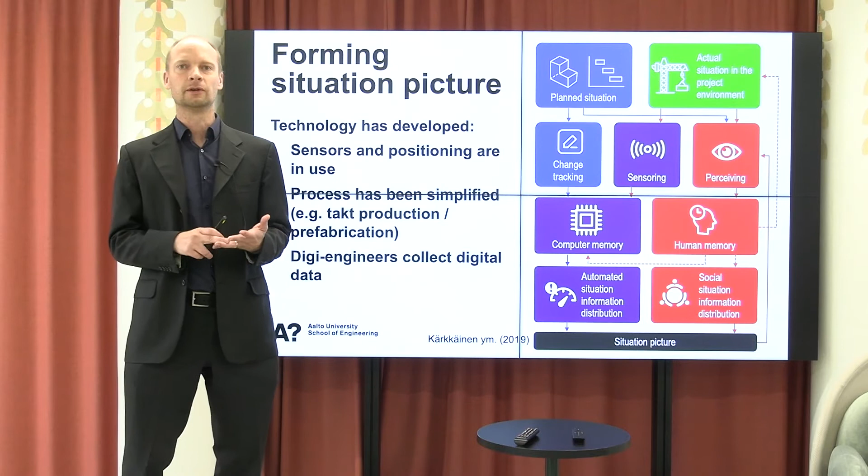Now with technology, we are getting new alternatives how to get situational awareness, and we call it digital situational awareness. We have sensors, we have cameras, we have all kinds of technologies that can be integrated, and situational data can be collected automatically. And this can all be saved to computer memory and automatically distributed. So now we have developed technology. There are sensors, there are positioning beacons, machine vision. We have simplified process. Big companies are implementing prefabrication and takt production, and digital engineers are collecting digital data.

But whenever we measure situation picture, we don't see that pretty results. For example, here you can see that when we measure how much the workers are in work locations, they spend 52% of their time in work locations altogether. But if you measure the time they spend in work location without interruptions, and they have to be present for 10 minutes in the work location without going away, we get down to 34%. So only 34% of the time people are able to work without interruption in construction sites.

When we look at whether they are in the correct location assumed in the plan, we get around 50% of the time. So out of this 34%, 50% of the time is where the plan is assuming the people would be. So we get a track record of 17%. We have defined a couple of KPIs based on this uninterrupted presence. The first one is presence index, which is uninterrupted presence in a task divided by actual duration of the task. Out of all of our measurements, we get 34.5% average with large variation. And variability, of course, is the root of all evil.

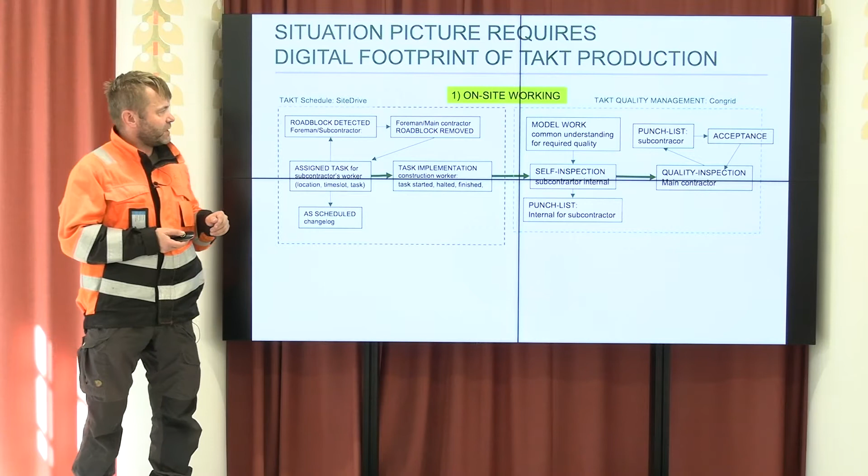We have the scheduling software in which we assign tasks for certain time slots for certain subcontractors and their workers. We receive from the site the acknowledgements when the task is started, finished, etc. A very important part is the roadblock management, so that the subcontractors let us know immediately if there is something that prevents them from implementing the tasks, and then we can have half of the footprint of the takt

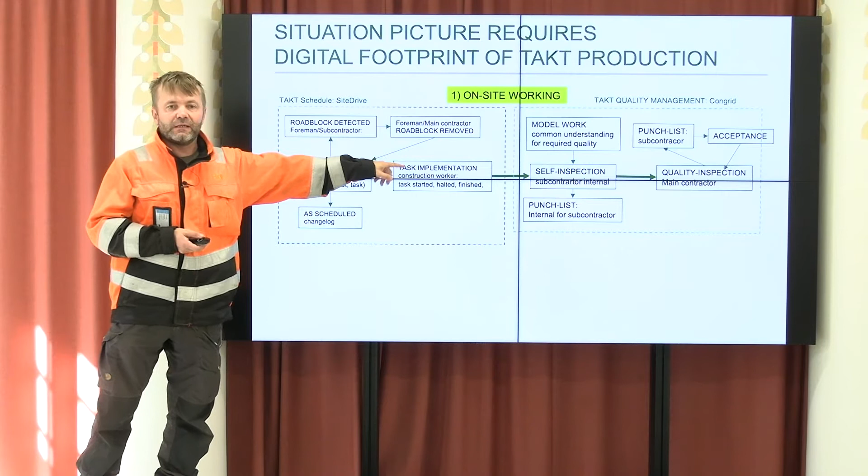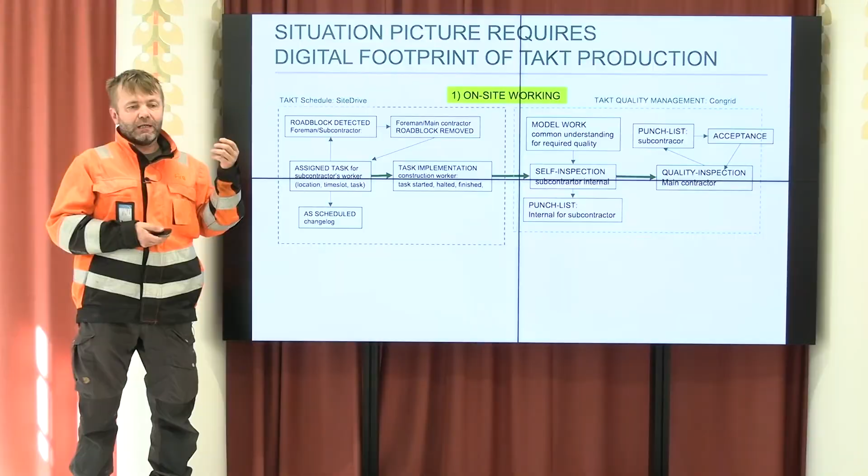production. But the main thing is finishing the tasks, so we have to have the quality management in place, and we have to have applications by which we can check the data, check the sites, update the data, etc. directly on site, so that we enable the real-time situation picture for the site office. And this is good. This is what we have done in 2 years.

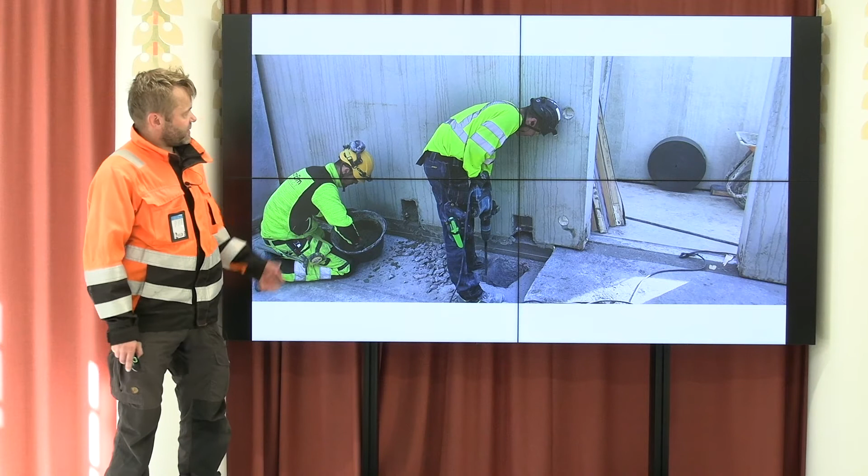But the next step we took was to change from the closed database to the platform. We moved with Google. We got very powerful equipment for the data management, and also we started to integrate more and more applications, data sources, and continued the visualizing with the business intelligence. This took us to the second stage or second generation, where we managed to provide the data from the production to the business unit. Business unit meaning the management for the whole housing department, for example.

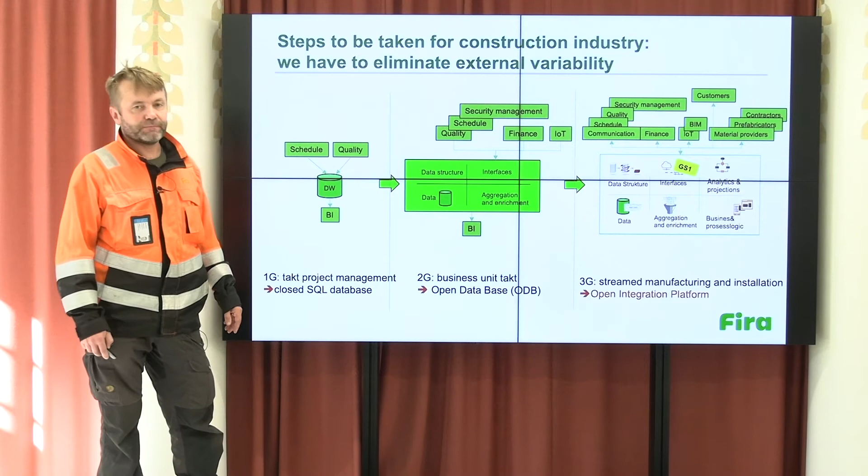Hi, I am Rita Lavikka, a senior scientist at VTT, Technical Research Centre of Finland. I have had the pleasure to be involved in digitalizing construction workflows in the DiCtion research project. Construction is often a project-based business where a new type of product, often based on competitive bidding, is being built through a process negotiated by project parties not familiar with each other. Each company, naturally, works to suit its specific interests and thus optimizes its processes based on these interests.

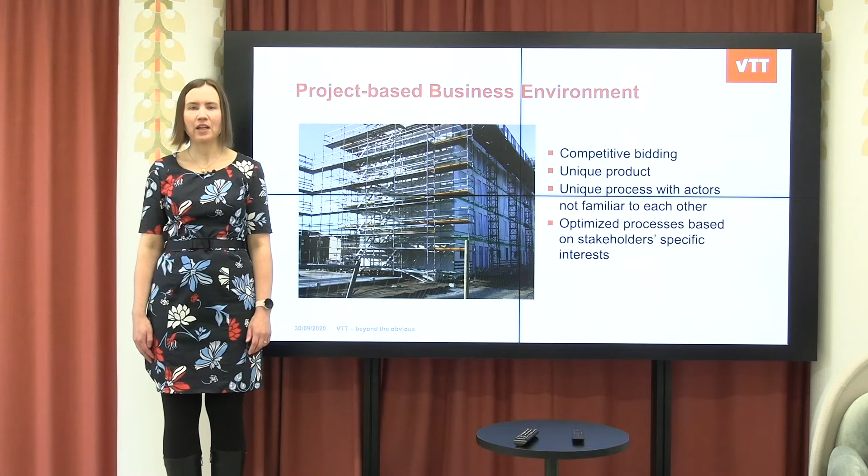In this kind of an environment, transparency of operations is required to enable collaboration. Implementing digital tools on site will result in greater transparency. Digital tools provide us with situational awareness, which tells what has happened, what is happening, and what will happen in the project. Unfortunately, many of the current contract forms are not transparent, and thus digital technologies are often opposed by parties who feel that they could reveal mistakes and make project parties more vulnerable to claims. Some companies even have business models that are actively benefiting from the lack of transparency, especially in the traditional design-bid-build environment.

New digital tools have been implemented fastest in contract forms such as alliance and integrated project delivery, which require transparency. In other contract forms, it looks like the owner must have an active role and require greater transparency for digitalization to happen.

Trust is a key prerequisite for creating digital situational awareness, which necessitates the sharing of data between project stakeholders and documenting the whole site with images and also recognizing the activities of workers. Even though digital tools can provide us with transparency, opportunities for misusing data exist.

Today's construction processes are based on blaming others for mistakes, but with situational awareness, the real root causes of problems will be revealed. Thus, all mistakes are visible and cannot be easily explained away. Transparency enables continuous improvement, but can also be used to attack the party who made a mistake. If technology is used in this way, there will be massive opposition.

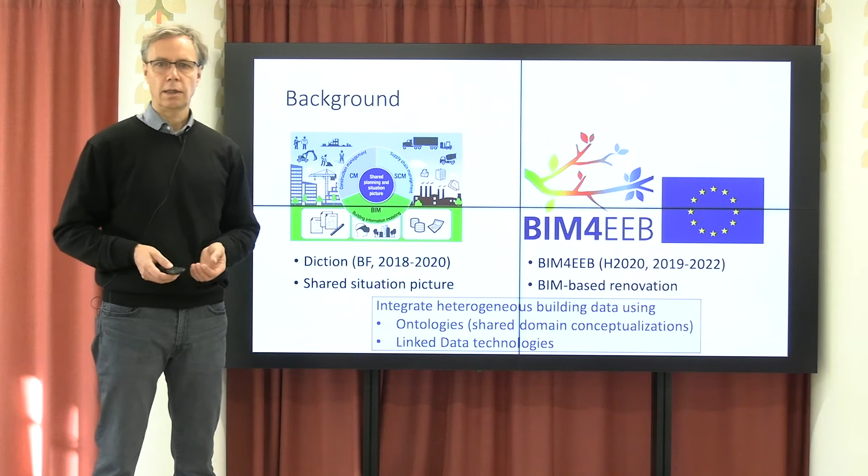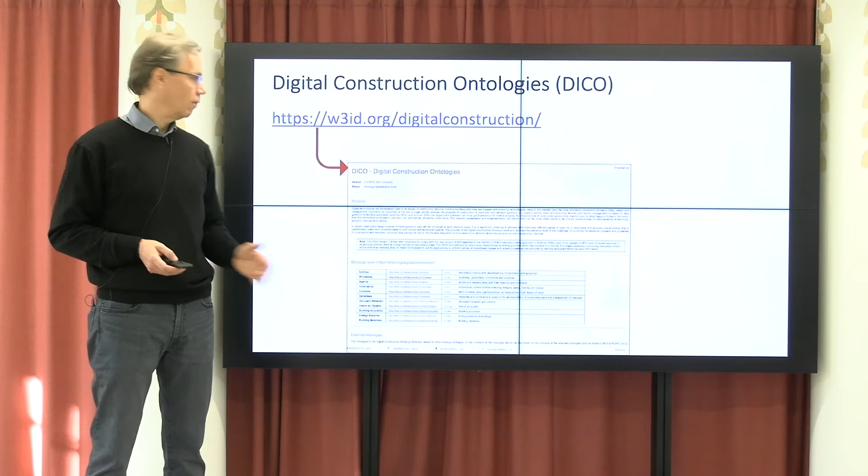And the common theme in both of these projects has been the integration of heterogeneous building data using ontologies and linked building data technologies. And we have developed a set of ontologies called digital construction ontologies, and we have published them on the web. There is full documentation available about each different module of the ontology, and there's also the source code of the ontology available. And the ontology is pretty broad, and it covers the different entities in the construction domain.

So the central ontology is called the entities ontology, and then there are further ontologies that specify different kinds of activities and processes, different kinds of agents in construction, and information content entities that appear in construction and renovation projects. In this use case, we have actually mapped this ontology to the data that's produced by the different companies.

Thank you. Hello, my name is Viitanen. I'm coming from the company called Carinafour, and I will show the short demo of our system called CALS, Carina Assembly and Logistics Service.

So actually, shortly, Carinafour, some 8 years old company, 14 million euros, 100 workers, takt-based production and logistics since beginning, big customers in shipbuilding and constructions. Our job is to actually take care of the material flows and enable continuous workflow. And if we go very simply through the basic elements in production and logistics in the value chain: the production is easy to run if you have the work instructions, resources, materials for the work tasks, then the progress-based scheduling. And our job is to handle the logistic part, provide the materials to the production, and

then we need the information, location-based material lists, material availability tracking, and then the material identification. And we need to be connected based on the same scheduling which is running the production. And the idea is that we have the takt production, work phases, and then we have what we are calling work packages per work phase or per takt, and then we have defined the material lists per takt.

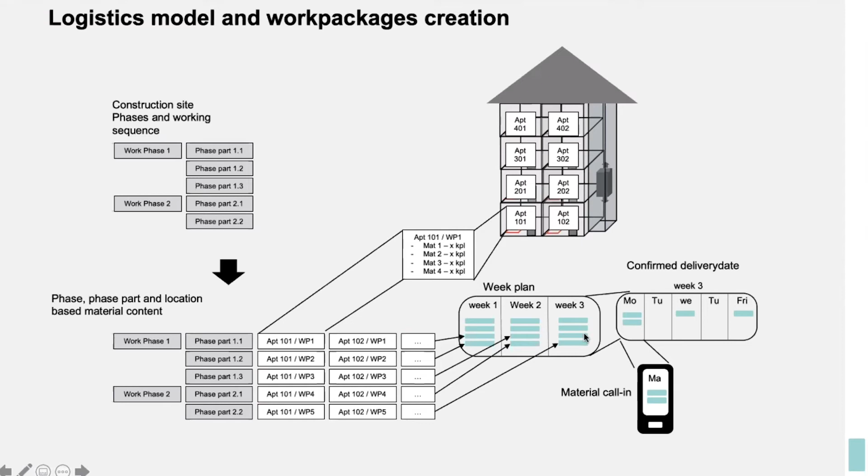And then we are managing the materials from the design stage to the procurement and logistics until the material is in the point of use and installed. And we are also managing related scheduling, weekly level and daily level.

And how the system looks like: we are maintaining and creating the project data so everybody can configure their own company in the system, establish the projects, establish the materials, and then attach the different attributes to the materials, like CO2 or dimensions or the instructions or the working hours needed per unit or the team who will install it. And then they can link the vendors as well, what vendors they are willing to use for the materials.

Then actually how to create the site and all the other locations in the system. So here we are establishing the sites and defining the floors, defining the flats, and this information could also be uploaded from other systems where those are created or established before.

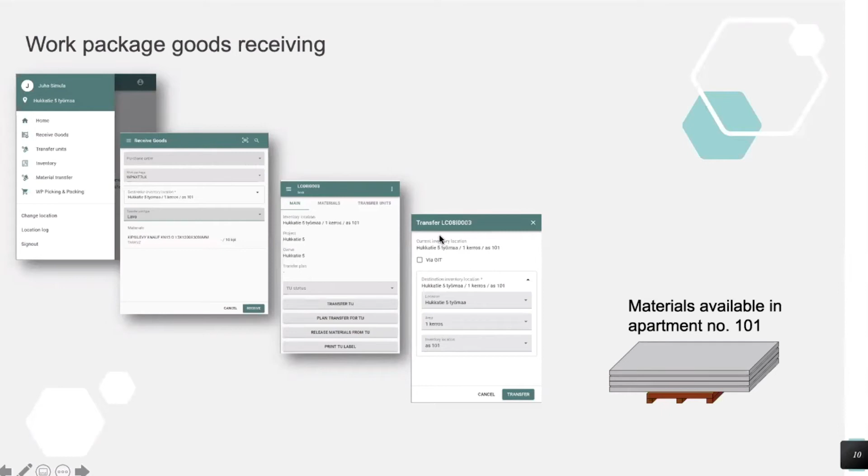Then in the system we are creating so-called work packages, the pickings, where we are picking the materials to the baskets, giving the destination, giving the time, and then managing the baskets. For example, here the flat number 101 in the address here, and then we have the picking and the picking items under it. And when we recall the material, first we just defined it, and when we're recalling it, we can recall it a couple of days before directly to the point of use. And then the vendors are doing the pickings and packings in our system.

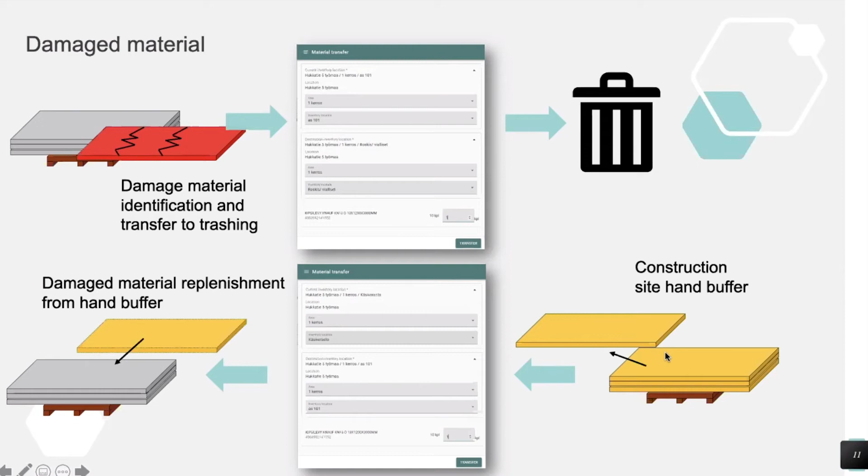And then we have here the actual example where we have the material package with the damaged material, and the damaged material we can get, for example, from Congrid, another system, the quality system, and we can ask the replenishment from the hand buffer and move it to the flat where it is needed, and then we can ask to get the hand buffer replacement material afterwards, so we can maintain the hand buffer level. And all these material movements are in the system. And all these material replenishment orders could be run automatically when the minimum level has been reached.

So this was more or less my presentation. We have the material management system, which is talking together with the scheduling system, quality system, and then we can also give the information from our interface to the reporting and situational awareness systems like a Fira control room, and then we can also utilize the same information together with Aiforsite, the systems where we could get the video data to analyze how the project went and how it should be improved further, and where we have the bottlenecks to improve.

So shortly, this was my presentation, and we are focusing at Carinafour on material management. Construction is an assembling process, and in all assembling processes we should manage the material flows very carefully.

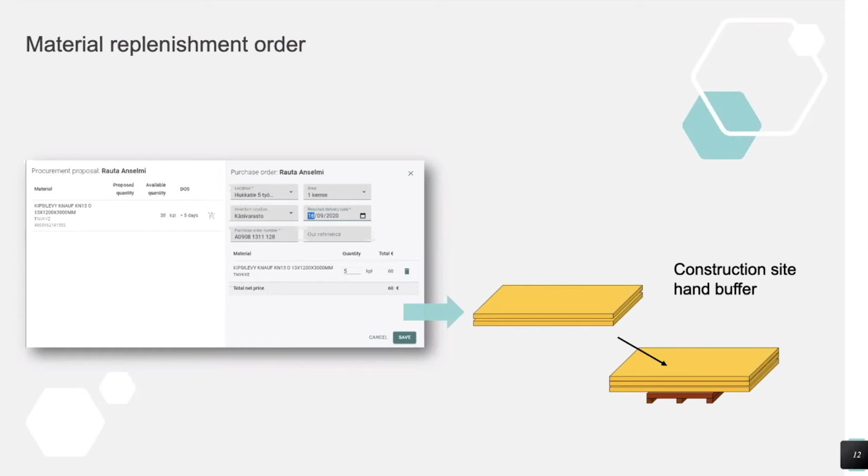Hi, my name is Timo Makkonen from Congrid, and I'm telling about quality assurance and defect management related to this case. So we've been talking about the delivery of the gypsum board and how the materials are handled, and my part is to tell more about the quality assurance process and the defect management, how it's handled now, and what the future possibilities are for defect management and quality assurance.

So the current state is that we can follow quality assurance on the work section level and by apartment. So we can have different work sections like gypsum board installation, and it can be divided into different subsections. And we also have locations like apartments, which is illustrated here, and like in Ari's presentation as well. So we have harmonized the data between the systems. So any inspection or defect found from the system can be linked to a certain work phase or a certain location. But we can do this on the item level, as we have systems discussing with each other, so we can link also the BOM level items to the actual inspection scheme.

And for example, if we consider that we have one installation ongoing, and we start the installation by accepting the site, we can link with that inspection that we have started the work, we have received the material, we can read the item, plus we can also trigger the next delivery to the next work phase. So we know immediately after we have made the first inspection that we have the material in place and we can ship the next material. And that can be done together with the systems discussing with each other.

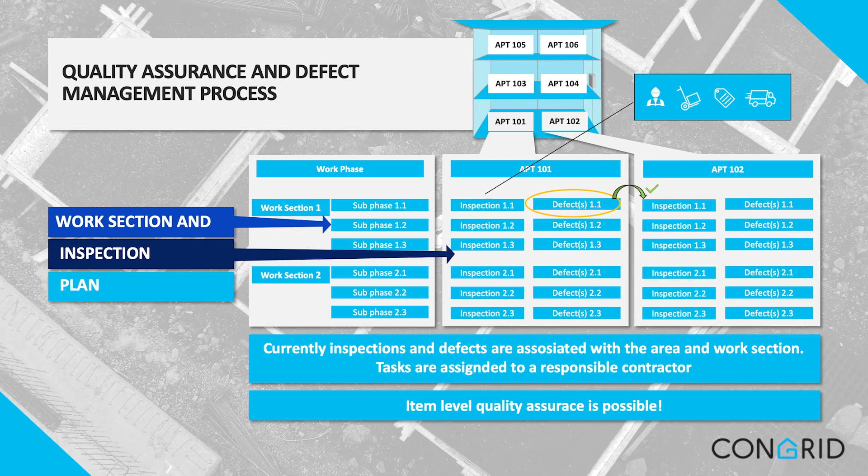Plus, we can also fix possible defects before we are moving forward. So we are improving our process bit by bit as building proceeds. So the defect which was found in the first place is not going to repeat on the second building, or the second apartment. So we improve the process and we can put the information moving between the systems.

And what does this mean on the system level? So we have this demo project at Hukkatie 5. It means that we have the basic information aligned with other systems. So we have the same project, same companies, plus we have the same areas, and we can also have the same items in all the systems. So we follow the data between other systems.

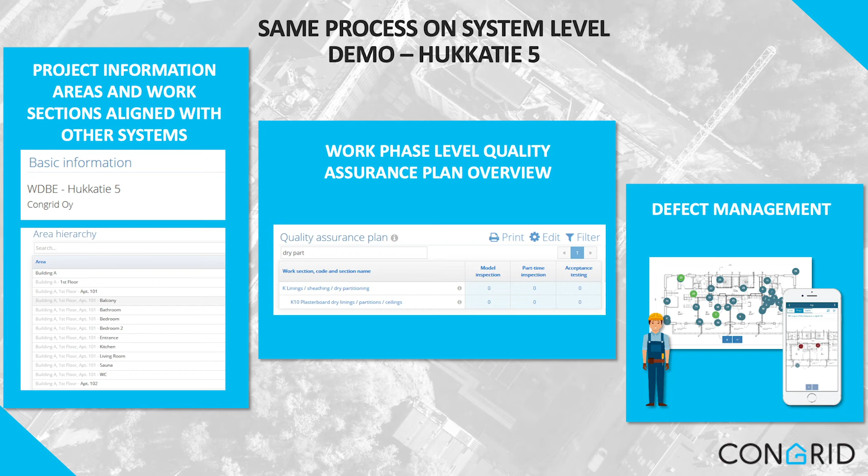And from the quality assurance point of view, we have aligned all the work sections and all the inspections made on the site. Plus, we can also follow the defects on each system transparently on the web and on the mobile, in such a way that it's available on the site and in other systems.

And now we have the situation that one gypsum board we received is broken. So at the site, we will record it on the mobile device, take a picture, mark where it was, and we can link it directly on the BOM level, meaning that for the specific item, the gypsum board, it is known that it was broken, and we can decide whether we're going to take spare supplies or supplies from apartment number 2 to fix that one.

After we mark the defect, everyone gets the notification, meaning system-wide and person-wide, so the installation parties plus the suppliers know that okay, there's a broken gypsum board, we need to fix that. And when we have possibly delivered a new board, we have documented the replacement delivery or the possible fix, for example, plastering the board if we decide not to deliver a new one.

And with the linkages between the systems, information is shared between the systems, plus we are building the as-built model as we build the actual building. So we collect all the data from different systems, in this case inspections and defects, and the other systems fulfill the package. So when we finalize and make the handover, we have the as-built model in place.

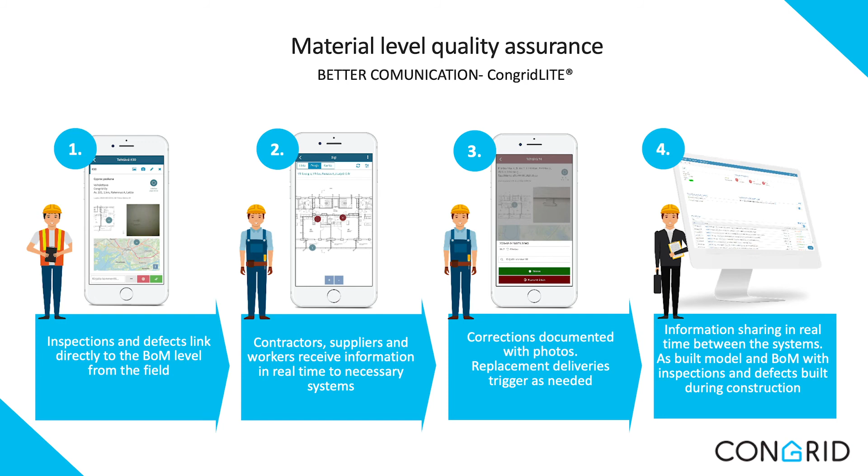Oh, hello, this is Tommi Vihervaara speaking. I'm acting as head of data for Fira, which is a construction company for a new era. Today, along with our 4 companies together here, I'm speaking on behalf of Fira, and I'm going to tell you and show you how to leverage digital solutions to smoothen the construction process, the main thing in our presentation being how to use ontology in practice. Here we have a concrete example of what can be achieved with proper master data management in Fira.

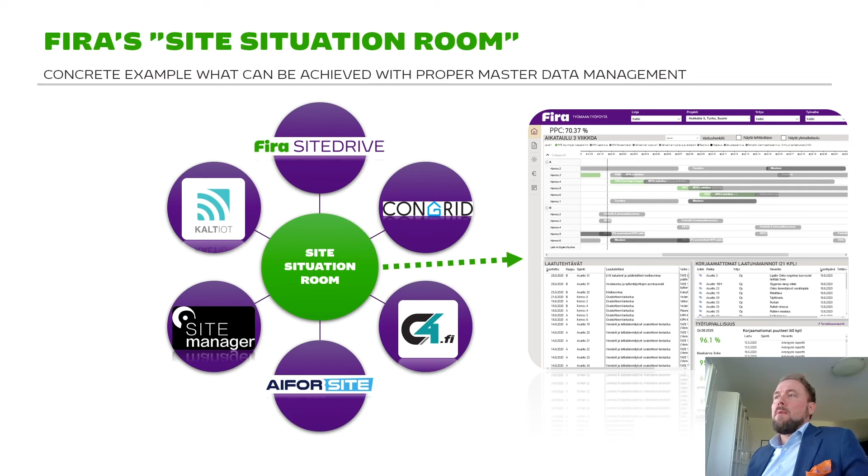So every construction site that we have is at the moment having more and more digital footprint that comes from the digital solutions they are leveraging at the sites. In the picture, in our concept site situation room, we are pulling the data from 6 to 7 different systems in real time and putting it in this real-time dashboard. And this is the core deliverable that comes out when you have properly defined your ontology, defined the data entities that you're leveraging, and this is the trick how to put them together. Common ontology.

And how does it look like? A very simplified version, but working with construction, you can see in the corners you have the typical areas of construction site management, the conditions, quality management, schedule management, and of course logistics and supply chain management. In a way, 4 or even more different islands separate from each other, but this is the trick. How to put them together is to have a common language and, in this sense, a common master data layer in between these 4 separate islands of data.

And the core entities there are, of course, space and location. You need to define in common language that we are talking about this very same apartment number 101. And when you start the construction project, you need to know which work phase or work section you are talking about. You need to have a common way to emphasize the work sections as well. And of course, speaking about materials and products, you need to have a common standardized representation for that as well, so that you can build, for example, a bill of materials along with the construction work going on.

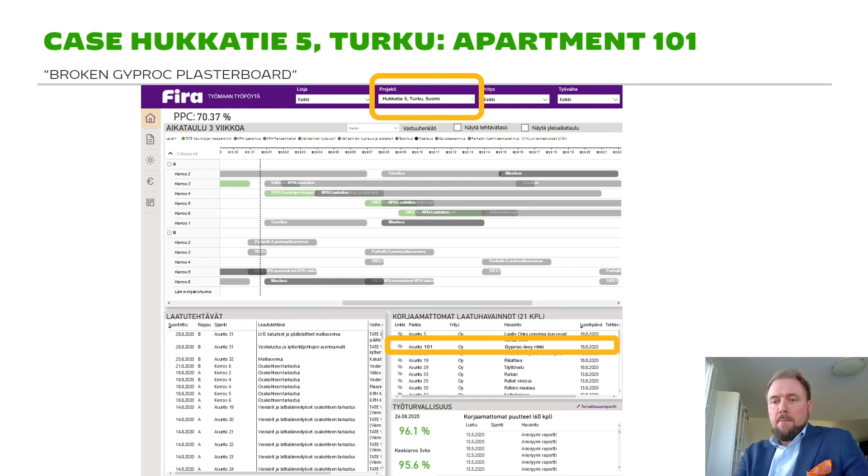And the next big thing is to leverage this idea of how to show the details of the specific plasterboard material there, and this is something where we will see some nice results in the upcoming months and years. So this was a brief example of how to leverage ontology work in practice and make the digital solutions even more effective and working together. Thank you.

Hello, my name is Pyry Virrantaus. I'm Chief Operating Officer at Aiforsite, and today I'm going to give you a case example regarding how we can use situational awareness and various applications to track delivery of a drywall package.

So it's very important for us all to enable takt production, and we have various means in terms of technology to do that. In this particular case example, we can really understand why it's very important to have a common data ontology in order to standardize and integrate the processes. So starting from the left hand side here, in this example we are tracking a drywall package, and this specific package is assigned for specific takt, and we start from the logistics center.

At the logistics center we prepare it for delivery. First we log it into C4's CALS application, and then we label it with an ArUco code, and that particular code is read by Aiforsite's AI engine, and we utilize cameras for that. We also attach position tags so that we can later understand where the package is traveling at the site. Then we move from the logistics center to the actual construction site, and we identify the particular drywall package at the site as follows.

We read the code utilizing Aiforsite's AI engine and cameras, so that will automatically identify that the package has arrived at the site. Then we also update that information automatically to C4 CALS, and we gain the benefits of full situational awareness of the whole site utilizing the Aiforsite solution. And from the construction site management perspective, it's very important to manage the whole schedule, and Fira SiteDrive is a good tool for that.

So moving on to the next part. What happens when the drywall package enters the identified takt area? Once again, the code is automatically read by the Aiforsite system, which means that all the various systems can be updated accordingly, so that the installation can take place at the site.

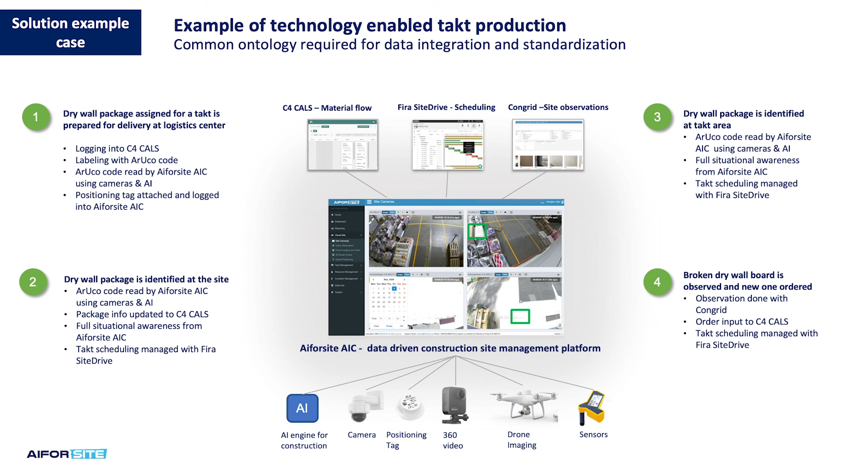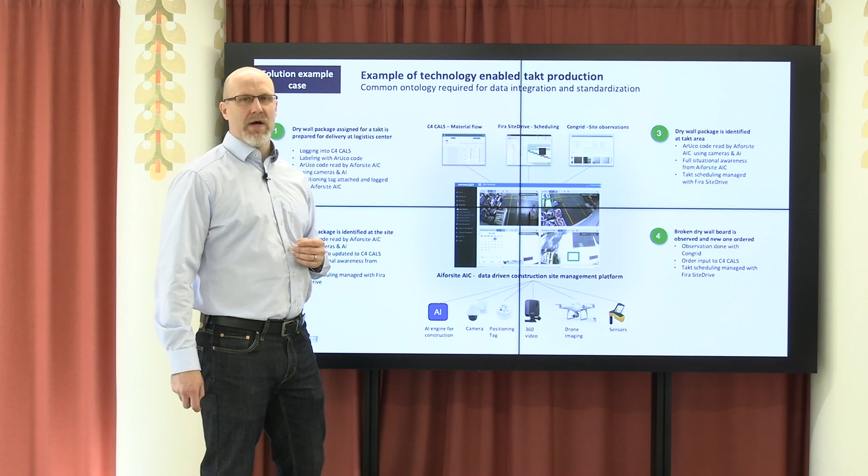In this case, there might be a situation where a particular drywall board is broken, and it would be quite natural to make that observation utilizing smart systems like Congrid for quality defect management. In that case, Congrid will also communicate with Carinafour's CALS to make sure that the order input is updated. And once again, that can also be managed by SiteDrive in terms of scheduling.

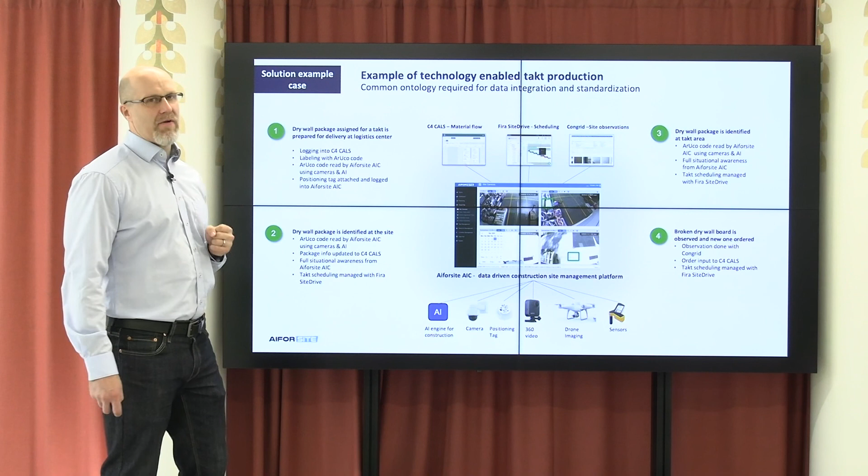So the point here is that in this example you saw various applications being used. You have various data sources, and in order to standardize and integrate this whole thing from the construction site management perspective, it's very important to have a common data ontology. Thank you.

Okay, we have now heard why reducing external variability is important and what the gaps are in the current state of the art in order to decrease external variability. We have seen solutions from 4 companies that aim to decrease external variability by integrating their solutions through a common data ontology. We have Carinafour, who is aiming to handle the material logistics part of the picture.

We have Congrid, who are responsible for quality management. We have Fira, who have a scheduling solution and a control room. And we have Aiforsite, which is aiming to bring all of these together into one common platform and provide situational awareness through various data sources.